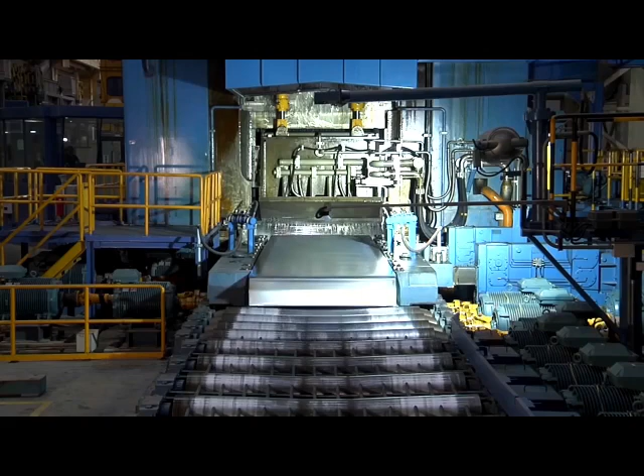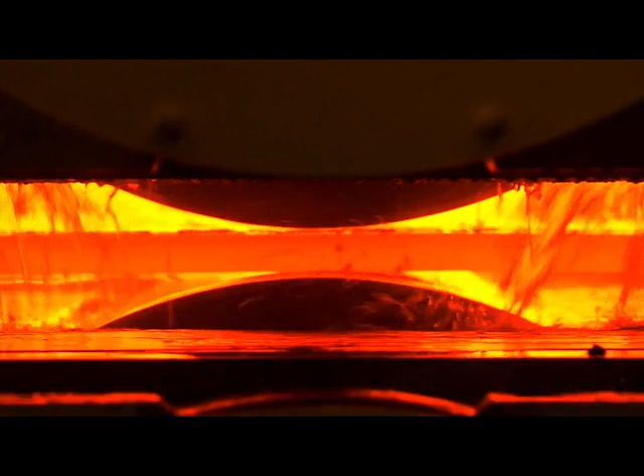Steel, iron, aluminum. Metal defines our modern world. At Gontermann-Peipers, we master metal in transformation. We produce highly engineered, high-performance components for today and tomorrow.

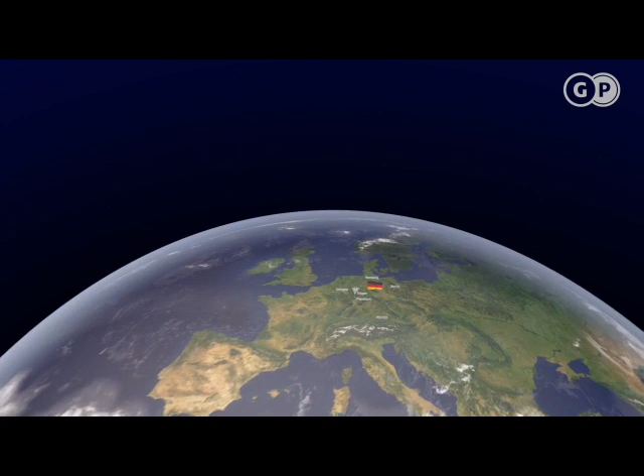Our roots are in Siegen. With its long tradition of ironworking, this region has become a hub for metallurgy that is unrivaled the world over. Machinery, equipment and components made in Siegen are in use in smelting works and rolling mills around the globe.

Founded with some audacity and a pioneering spirit in 1825, today, Gontermann-Peipers is in its 7th generation as a family-owned company. The Marienborn and Hain sites, with more than 500 skilled workers and sales totaling more than 100 million euros, form the foundation of GP's success story.

Gontermann-Peipers is a reliable partner with strong roots. We're financially independent, and we have ensured our sustainability by continually investing in production and research and development.

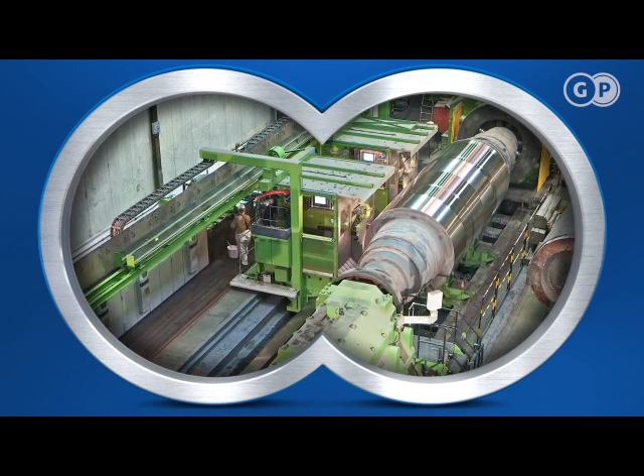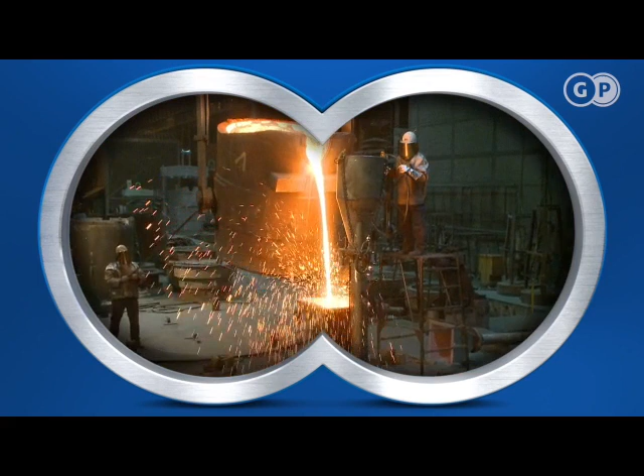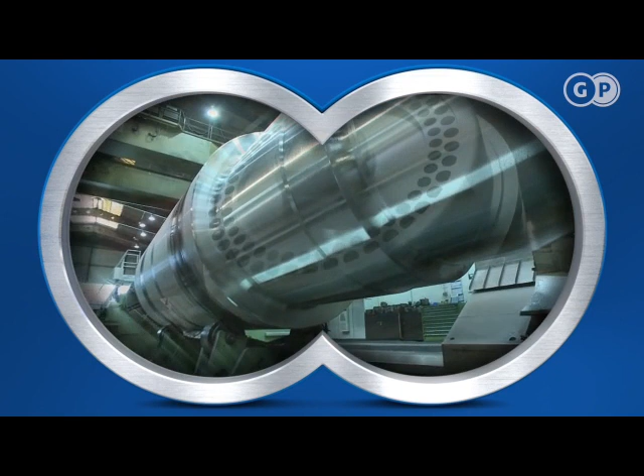Our outstanding technical advancements include the invention and constant improvement of the double-pour steel casting process, the development of proprietary vertical centrifugal casting technology, important improvements in materials in continuous casting, and production of very heavy rolls up to 265 tons. GP is one of a handful of companies selected to manufacture nuclear casks according to German standards.

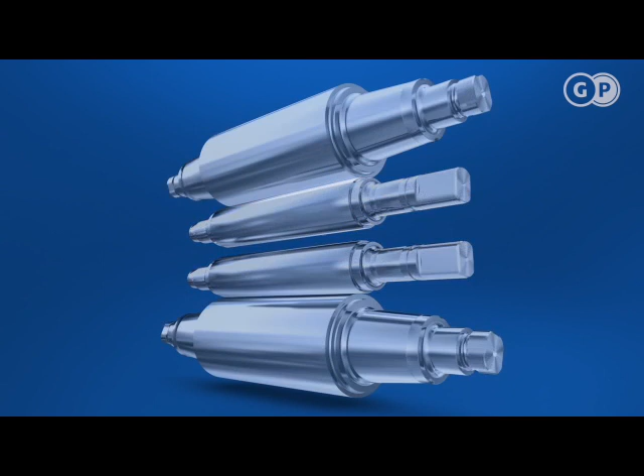The Marienborn works produce work rolls, backup rolls and shaping rolls, as well as casks for the nuclear industry. The Hain works are home to GP's other production lines: chill and centrifugal casting, composite rings, continuous casting and hand-molded casting.

Gontermann-Peipers' long-standing business success forms the basis for a multifaceted commitment to the community through the Gontermann-Peipers Foundation. This includes, for example, support for various social initiatives and schools in Siegen and the surrounding area, or the donation of a decommissioned GP locomotive for a good cause.

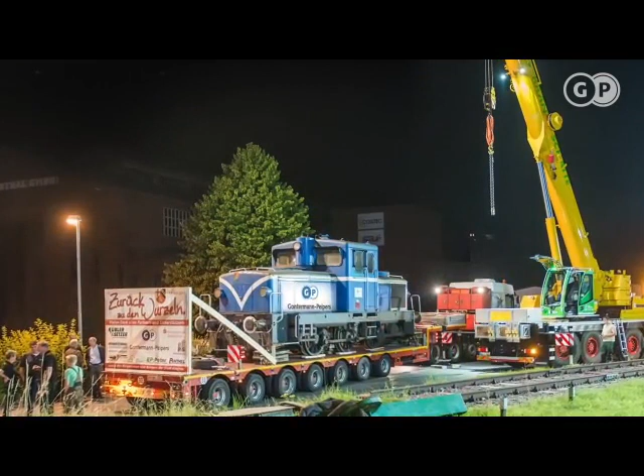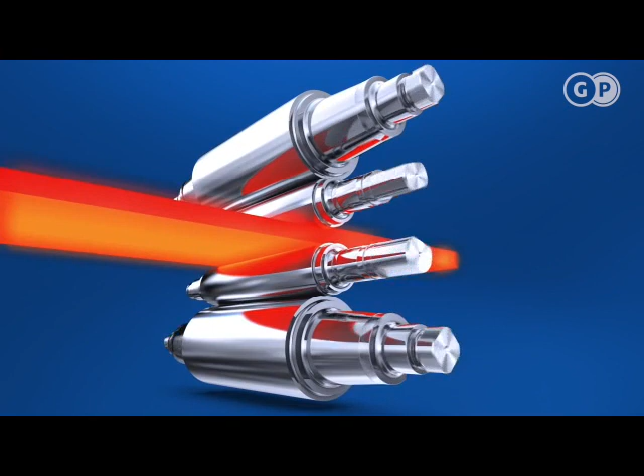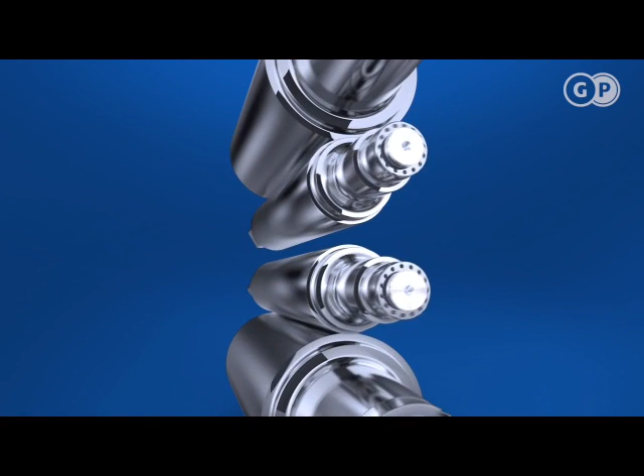Rolling mill rolls for metal forming have always been a central component of GP's product range. During the rolling process at the customer's works, slabs of heated steel or aluminum are rolled down to the desired thickness in multiple passes. GP uses carefully selected, high-quality raw materials to manufacture its high-performance rolls.

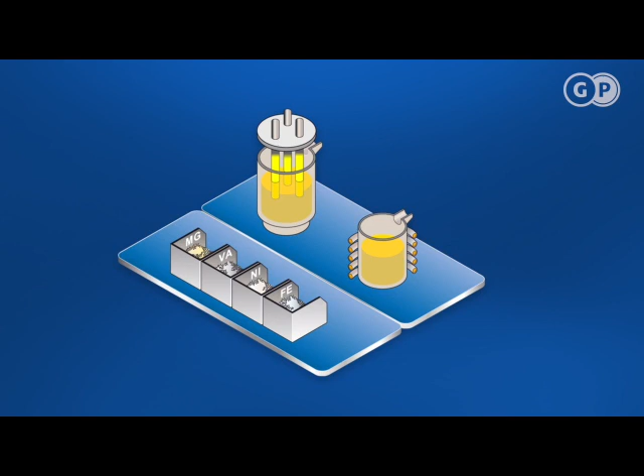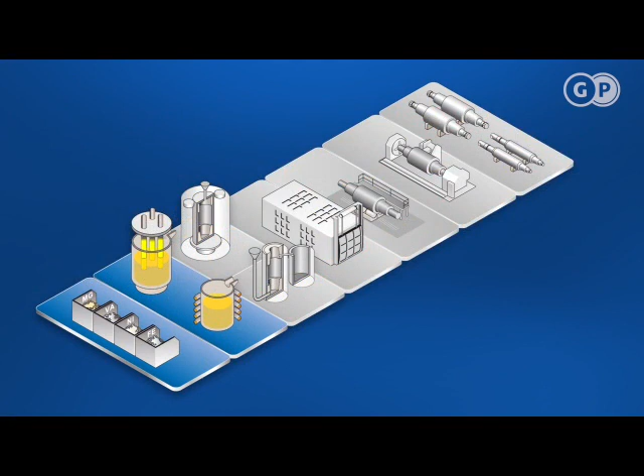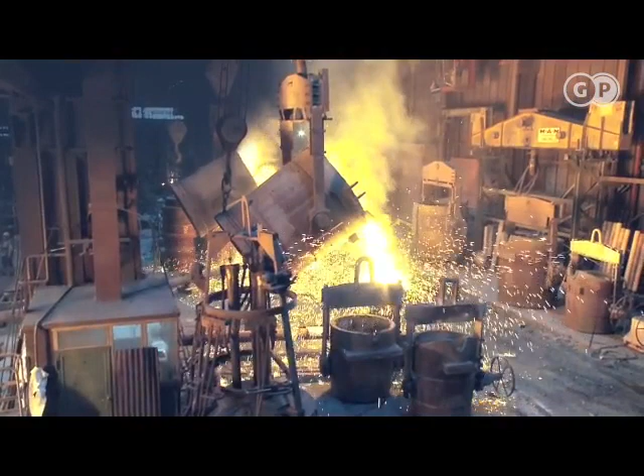The arc, induction and holding furnaces in the Marienborn melting shop provide a total capacity of more than 500 tons. Once the melting process has been adjusted correctly, the rolls are cast using the static composite or centrifugal casting process. Thanks to the combination of different materials, composite rolls offer both extremely high wear resistance in the working layer and high core material strength and toughness.

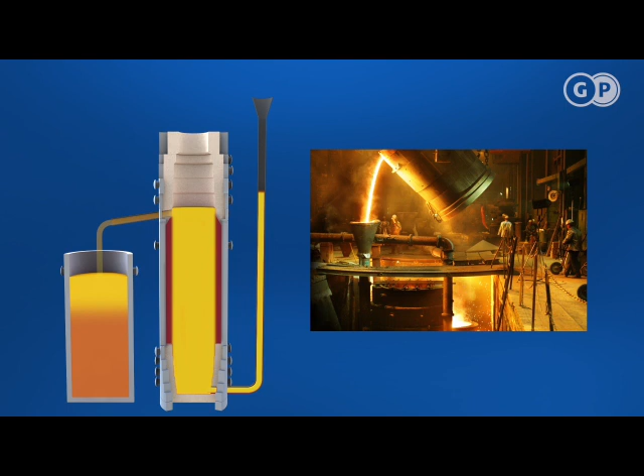In the first step, the lower neck and mold are filled with alloyed shell material. The chill mold ensures rapid cooling of the outer shell. The core iron that is then poured in displaces the molten portion of the shell material until the lower neck and body consist entirely of core material. Finally, the upper neck is filled with tough, high-tensile core material.

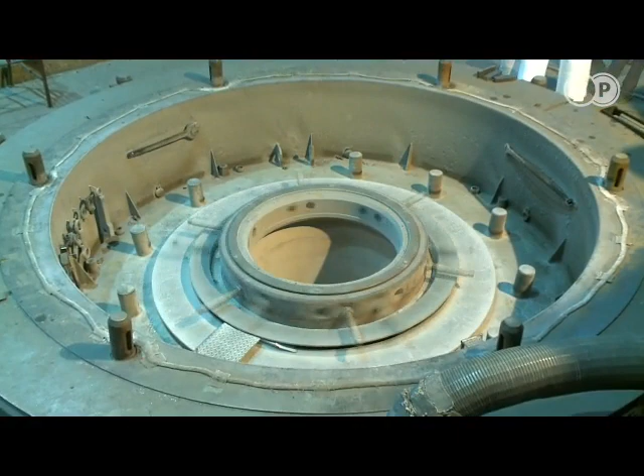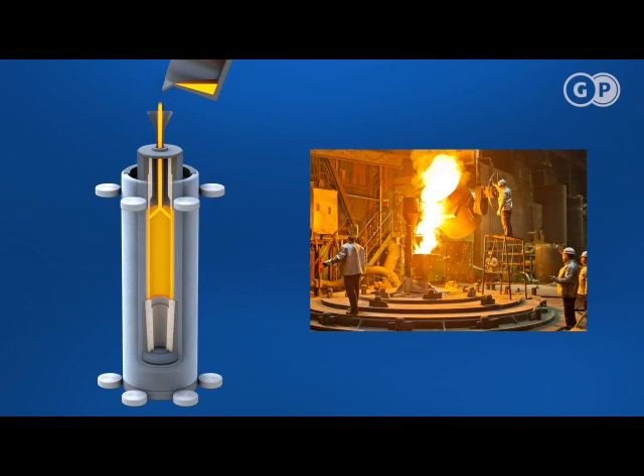The GP centrifugal casting process, developed by Gontermann-Peipers, also permits various combinations of materials for the roll shell and core. In this process, first the shell material, alloyed iron or steel, is poured into a vertically rotating casting mold. This will form the working or wear layer of the roll. After that, the molten spheroidal graphite cast iron for the roll core and necks is poured into the still rotating mold.

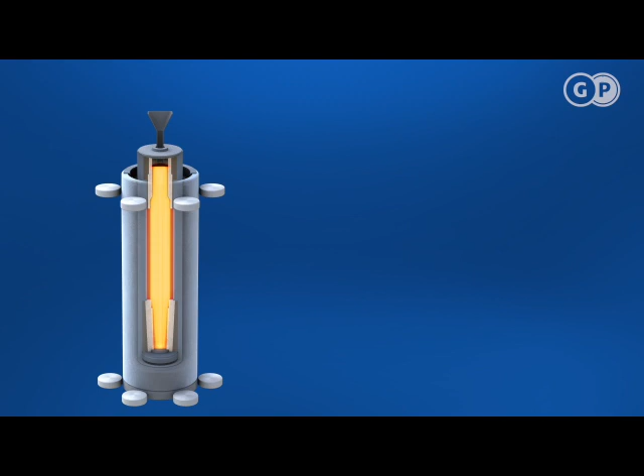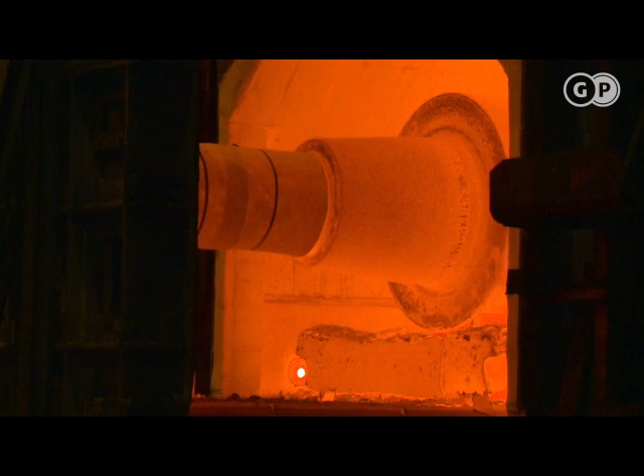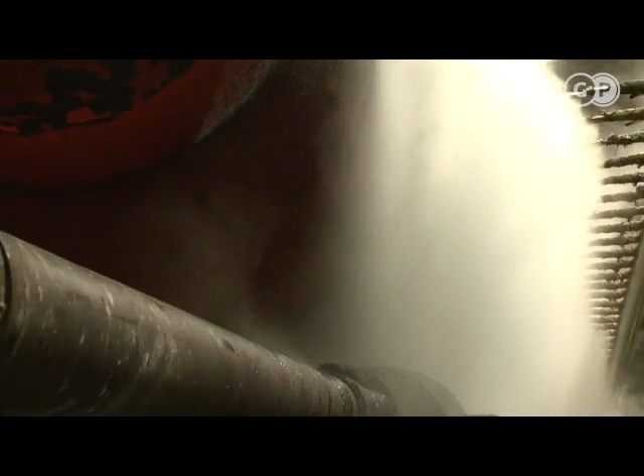Heat treatment is essential to the successful production of high-performance rolls. Here we combine proven expertise and experience with state-of-the-art process control. The rolls are heated to a temperature of more than 1000 degrees and carefully quenched. This is done by an automated spray system using air or water.

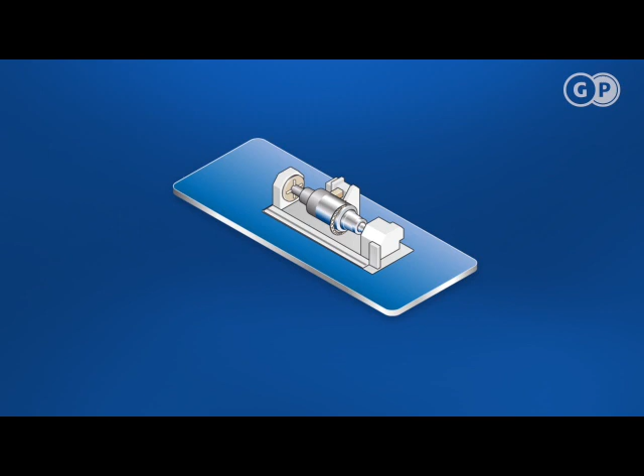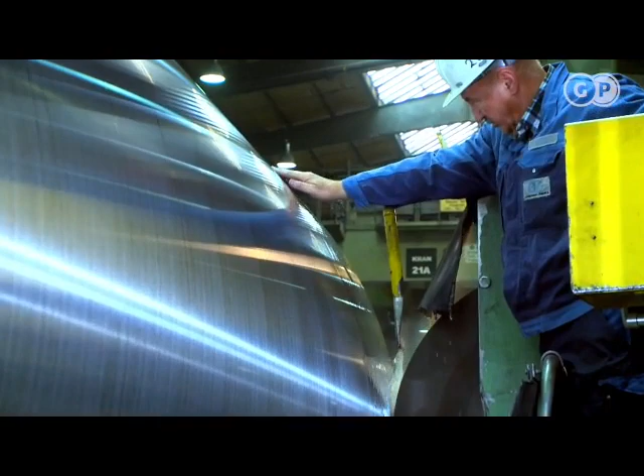GP's test methods, including, for example, residual stress measurement and ultrasound testing, ensure that the rolls are flawless and fully functional when they leave our works. After this, the rolls are finished using modern CNC-controlled lathes. On the grinding machine, dimensional accuracy is a matter of just a few hundredths of a millimeter. Deburring the rolls calls for the craftsmanship of our skilled workers.

On completion of all these manufacturing steps, the roll is carefully preserved and packed. Now it is ready for shipping to customers around the globe.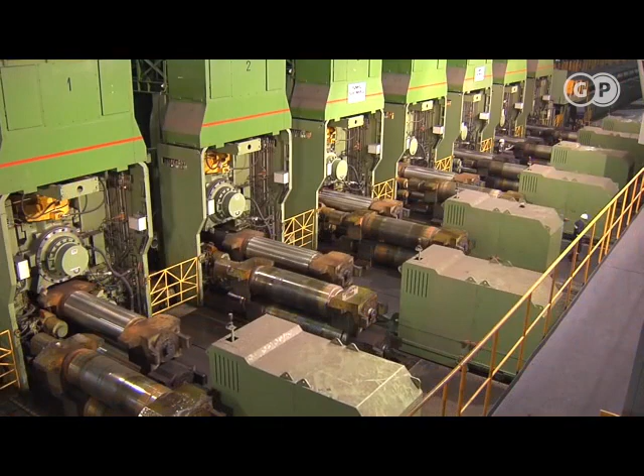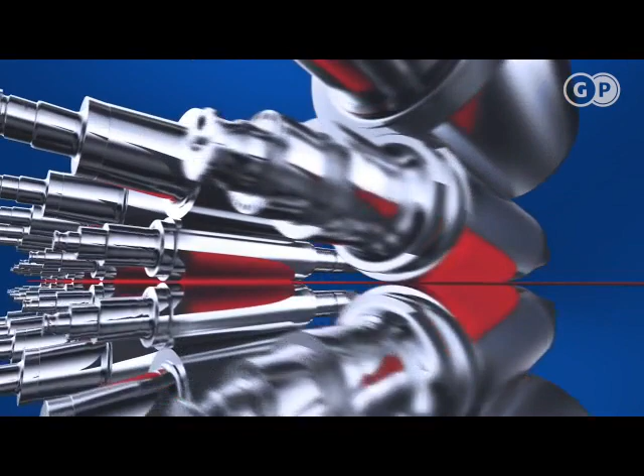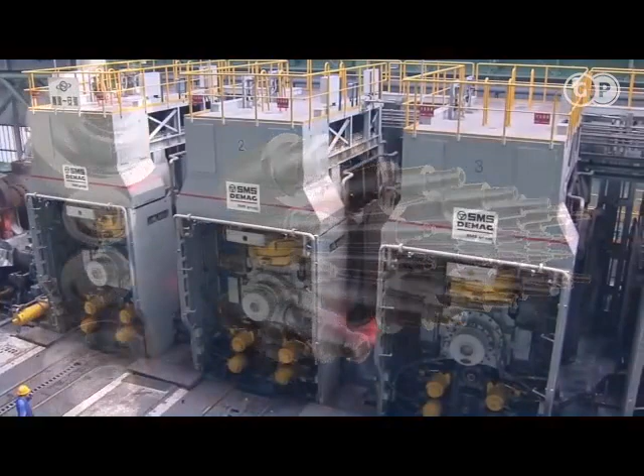Gontermann-Peipers develops and produces high-performance rolls to meet increasingly stringent requirements in hot and cold rolling mills. GP's highly professional service team offers application-oriented advice as well as individual solutions for problems concerning the roll and roll gap. Our rolls offer high wear resistance, long running times, and constant hardness down to the final diameter.

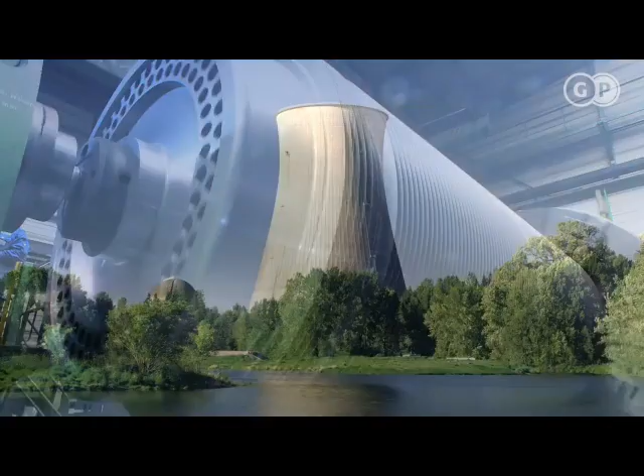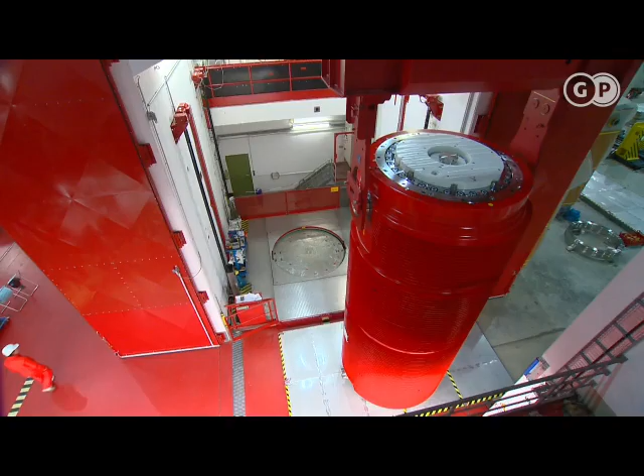Castor nuclear casks are used to store and transport highly radioactive spent fuel for the nuclear industry. They are among the best tested and highest quality castings ever made. GP is one of just a handful of certified foundries selected to cast and machine Castor containers, which weigh up to 100 tons.

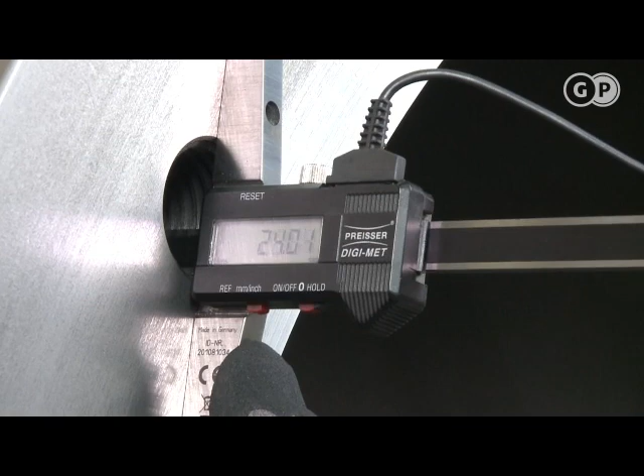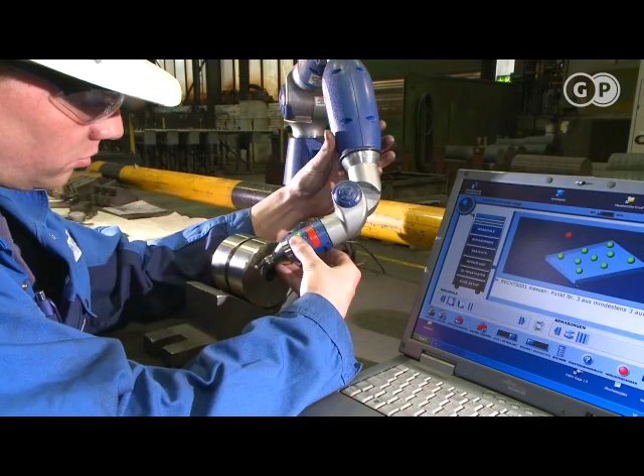Due to the extremely rigorous quality specifications in the nuclear cask sector, GP has maintained a government-accredited test laboratory since 1997. GP's rolls and other products also benefit from the strictly monitored laboratory equipment and processes.

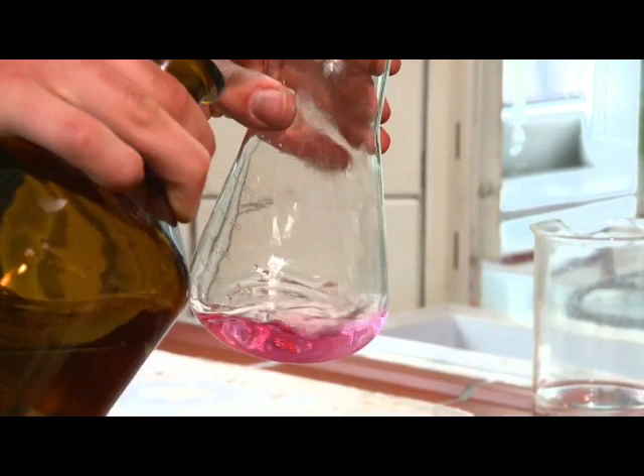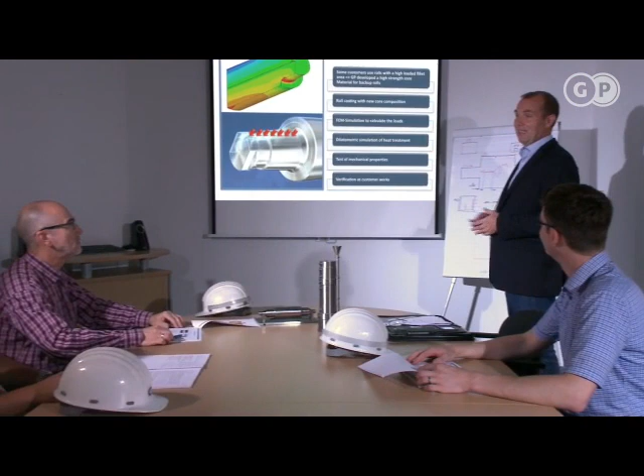Research and development is very important at GP. The annual R&D budget amounts to between 2 and 4% of revenue. At GP, in-house development is handled by interdisciplinary teams. Once functioning prototypes are available, field tests are conducted in cooperation with selected customers.

Modeling and optimizing complex casting processes by simulation methods is standard practice. In addition to its in-house R&D resources, the company maintains long-standing, direct relationships with renowned universities and research institutes. Both works have all the usual certifications. The Integrated Management System, IMS, encompasses quality, production processes, energy, and the environment.

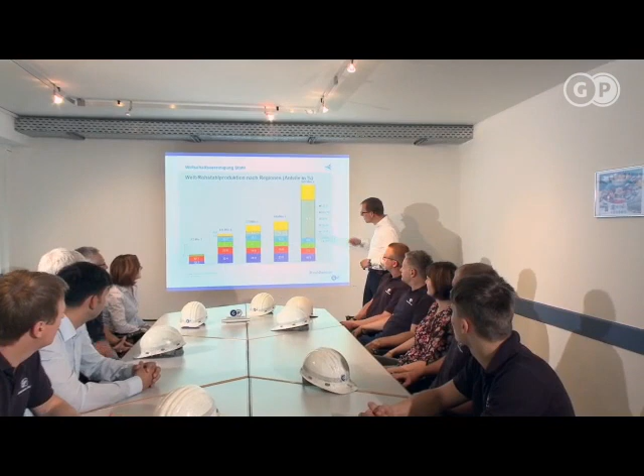Many employees come from families where they represent the second or third generation to work at GP. This is what gives GP's corporate culture its distinctive flavor. Systematic profit sharing for all employees provides incentives and strengthens the sense of belonging to the company. The profit sharing scheme goes hand in hand with a very open information policy.

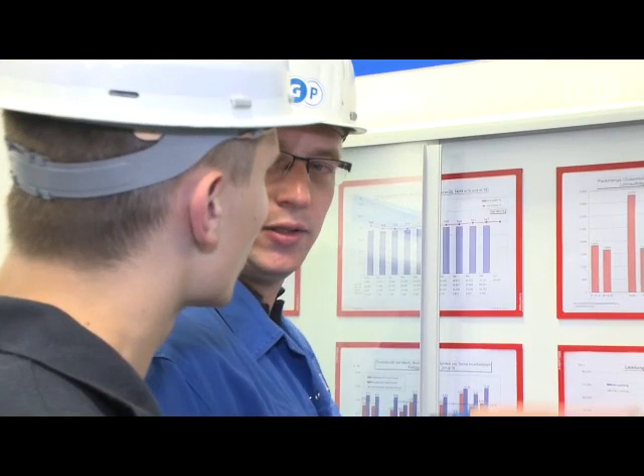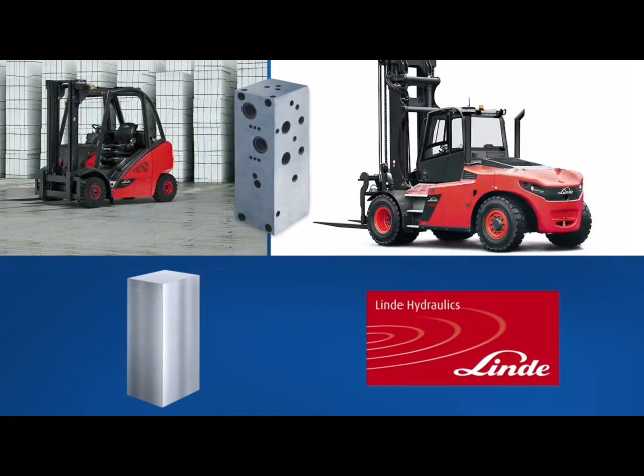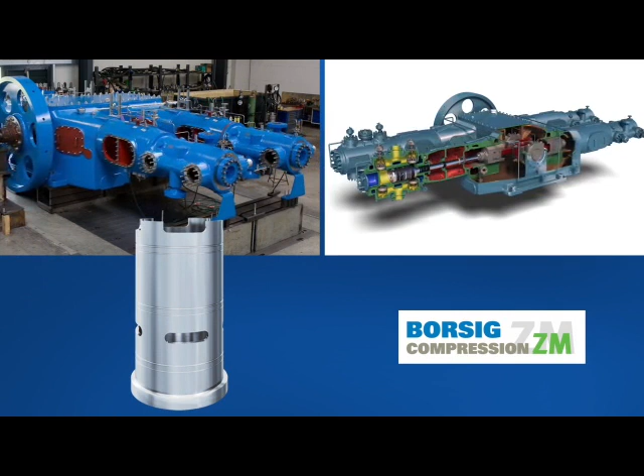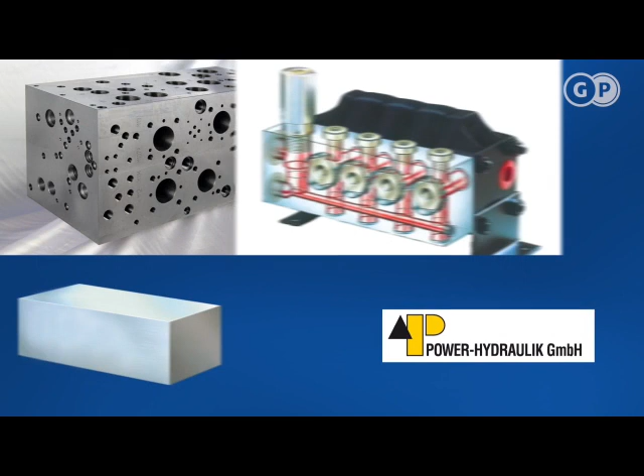centrifugally cast cylinder liners for piston compressors, round continuous cast core components for vacuum pumps, square GP continuous castings for hydraulic control blocks, GP chill cast guides for hydraulic presses.

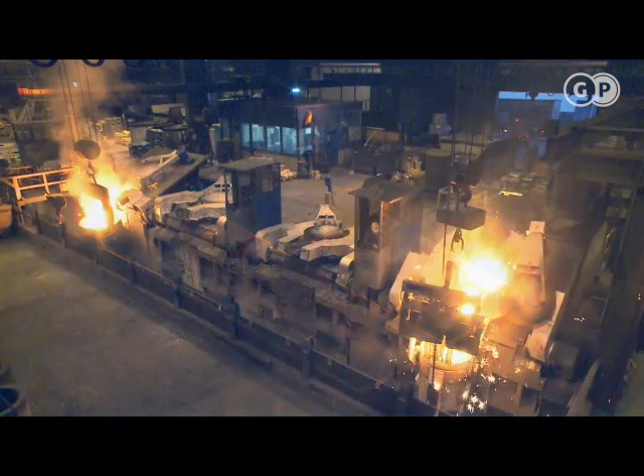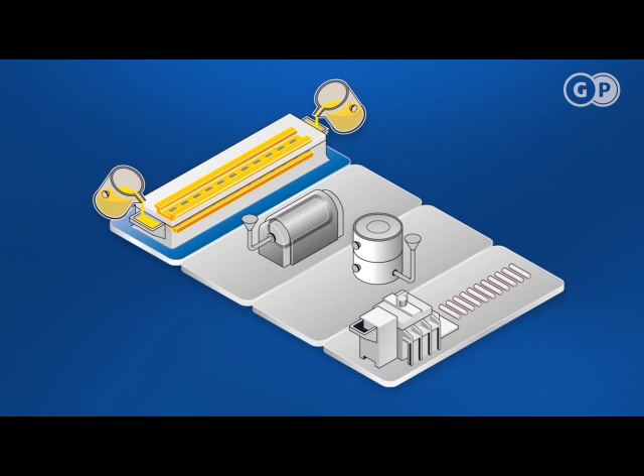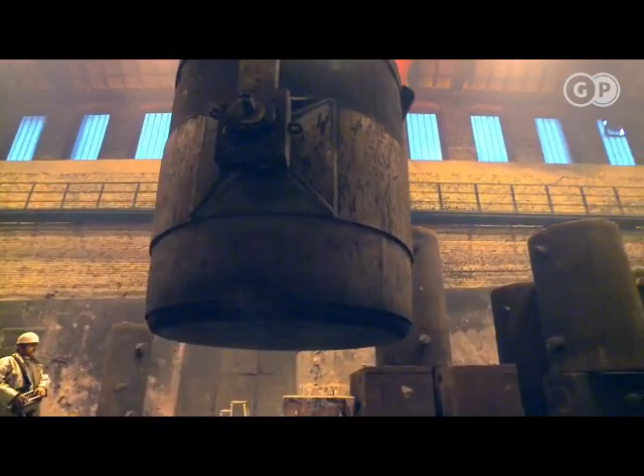The Hain plant has 9 induction furnaces with a total capacity of 160 tons. The range of casting processes includes hand-molded, centrifugal and chill casting, as well as continuous casting. At the Hain works, hand-molded casting is used to produce machine parts weighing up to 160 tons apiece. GP makes single material and compound cylinder liners by horizontal centrifugal casting.

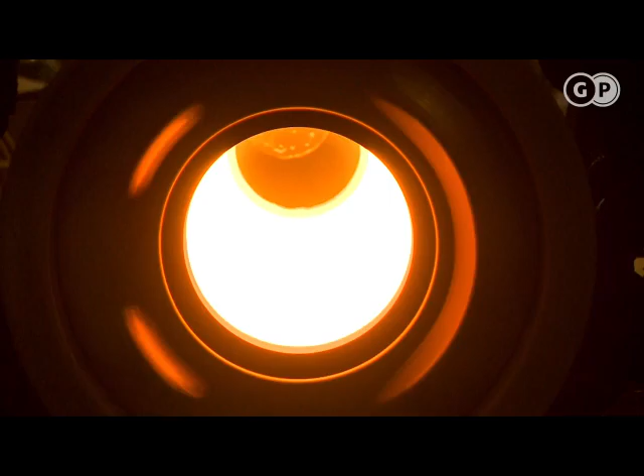GP continuous casting is a technically advanced production method for round, square and flat bars. These products are characterized by a dense, fine-grained and easily machinable microstructure. Heat treatment optimizes the material's properties for the different end uses.

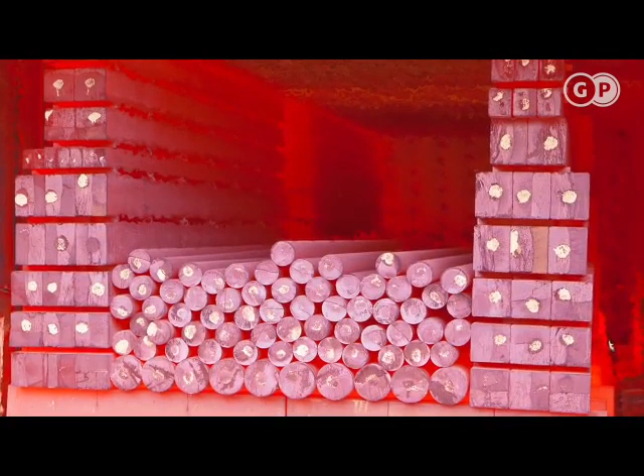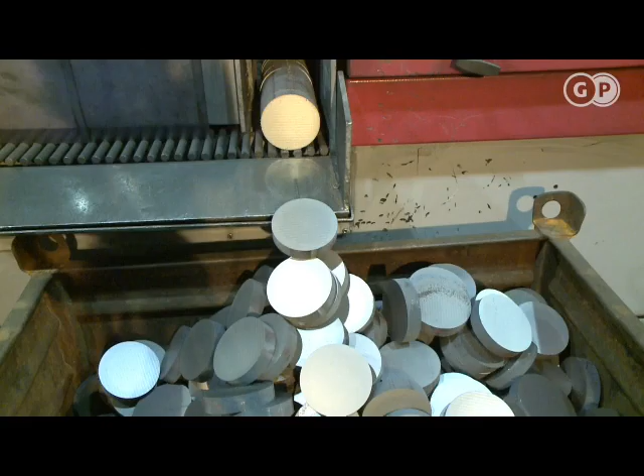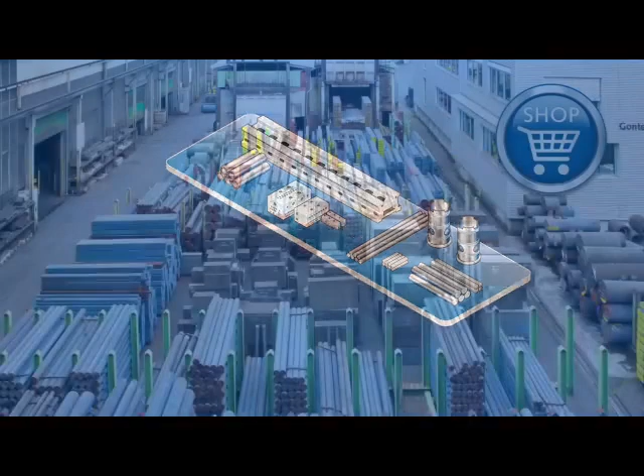The mechanical process sheds at Hain house 50 machines covering a very wide range of operations, including sawing, turning, drilling, milling and honing. GP maintains an extensive stock of continuous and chill cast products in the most common dimensions. These inventories can also be accessed quickly in the GP online shop and are immediately ready for shipment.

Ultimately, Gontermann-Peipers' strength lies in long-term cooperation with customers based on mutual trust. The family-owned Siegerland company owes its success to the rolls and containers produced at the Marienborn works and the wide range of cast products produced at Hain.

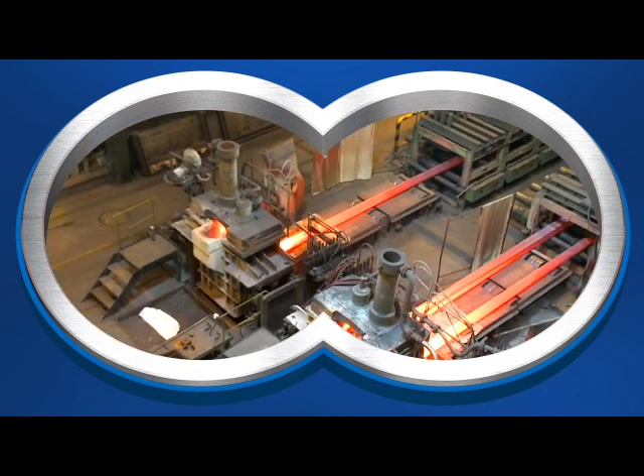Secure, ongoing partnerships centered on first-class products and competent service and advice will ensure this success carries on long into the future. No doubt about it, you will be able to carry on counting on us. Gontermann-Peipers. High performance cast components.